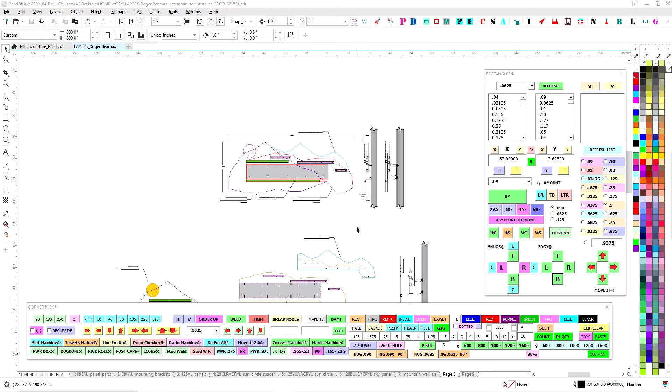All right, who wants to make some wall art? Let's go over how to put this thing together.

Let's go over how parts are laid out. 090 gauge is going to make some equilateral C channel. So look for those. We've got the backer for the panel and the backer for the wall.

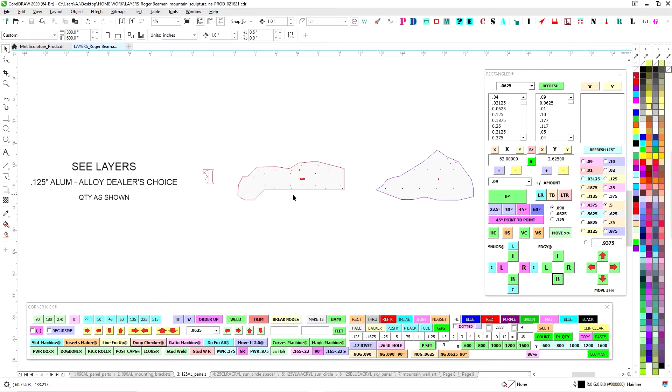That's how it's going to get mounted. The actual mounting panels are 1/8 inch. Alloy can be dealer's choice, whether it's 5052 or 6061.

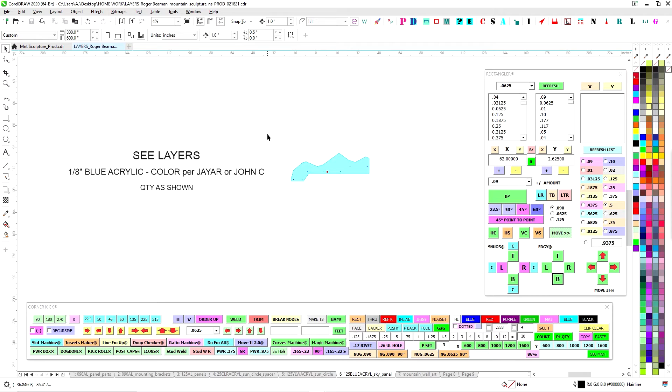We've got this little clear nugget that's a spacer for the sun. The sun is going to be a piece of acrylic, translucent yellow, but specs are per Jayar or John C. Same thing with this blue acrylic here, it's supposed to be the sky. It's translucent, but again, I don't know the color, so check with them.

We've got a pattern for install. Not a whole lot going on, just want to convey how it's all going together here.

So we kind of traded out the square tubing as it was originally designed for the C channel, so it's easier for us to make, and we can Cleco it and reference it and all that, so we don't have to do a whole bunch of nonsense there.

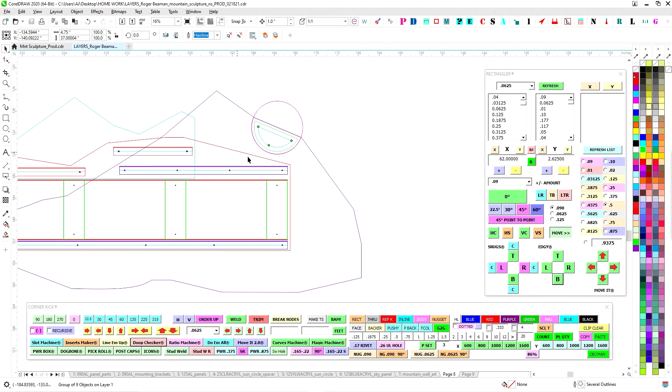But as you can see, you'll have the sun here, that's in magenta. That's going to be stud welded, so you'll have 3 stud welds on the one panel there, and then that's going to be sandwiched in between.

When you go to do final assembly, this guy has it here. I was thinking these are going to be 10-24 studs. We should have the acorn nuts left over, maybe we could put those on there and make it look clean.

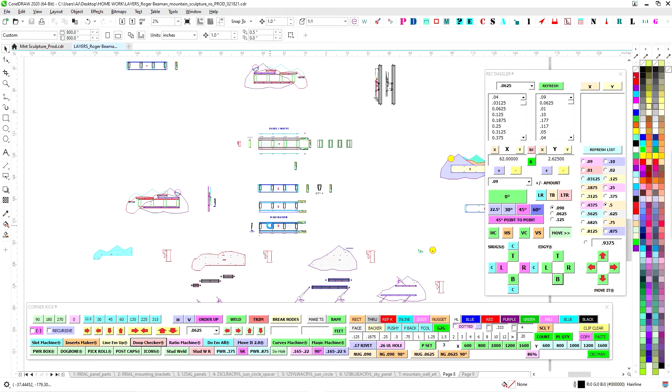The ones left over from the living desert, so look out for that when it comes to final assembly. But otherwise, it's all pretty straightforward.

What you're going to do is bend up your C channel first, and then you can choose whether to tack these little end caps in or do some masking tape and get them all set up, masking tape them all off and then just lords them in. That might be a little easier in the long run.

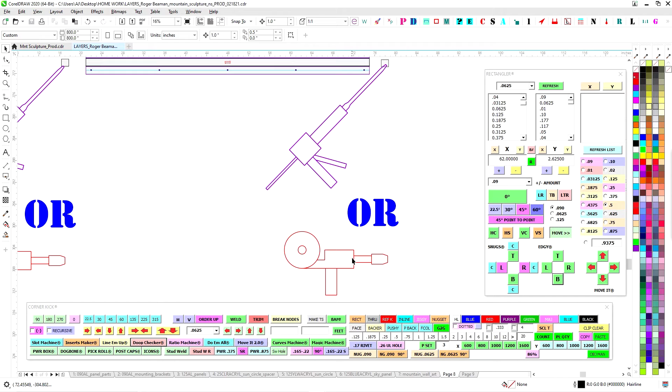We just don't want to do any burn through. We want to keep prep to a minimum here, so if you do tack them in, just be gentle and don't burn them. We're trying to keep labor to a minimum.

So get the channels all ready to go, and then you can go ahead and lords those to each panel corresponding. So I call this one panel 1 because it's the first panel out here in purple.

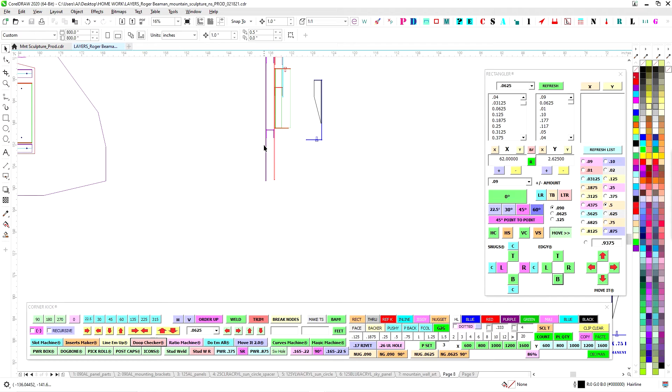So you'll take the 2 corresponding ones here. They are symmetrical, so it doesn't matter which way they go, just lords those on here. Make sure you lords them on well, because this is going to have to hold this on, and make sure that the channel faces down, so that way it kind of looks clean.

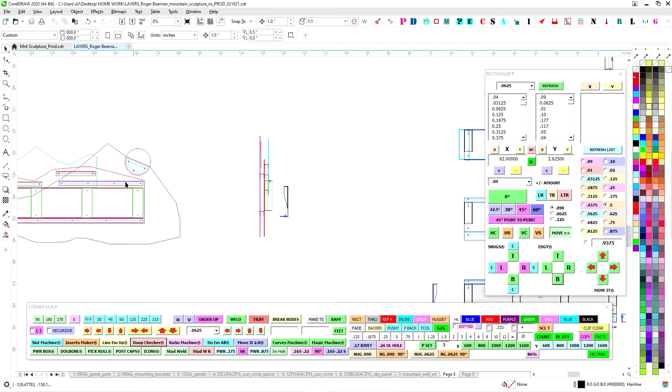So the ends will be capped, and if you're looking in from the ends here, it'll look all sealed up and everything. So on all the channels, make them face down, the opening. Then shoot the 3 studs here, and you're good to go.

That's panel 1 done. Same thing here. Once you get these all ready, go ahead and loarc them in the proper spots here, right there and right there. And then you'll also be getting the panels ready.

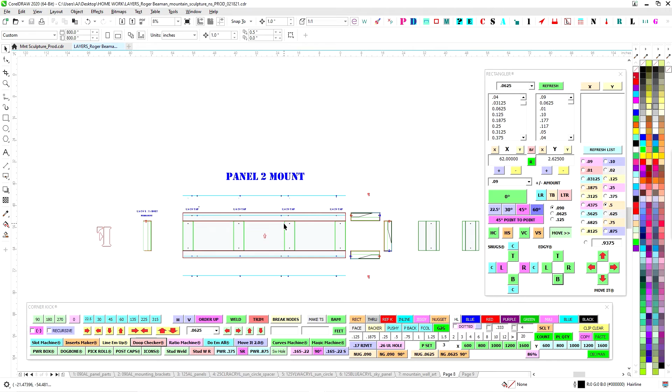So once you get that ready, then get these mounting panels ready. Kind of like what we do, you'll have for the one that gets attached to panel 2, you'll have the 2 asymmetrical ones. Those are the end pieces.

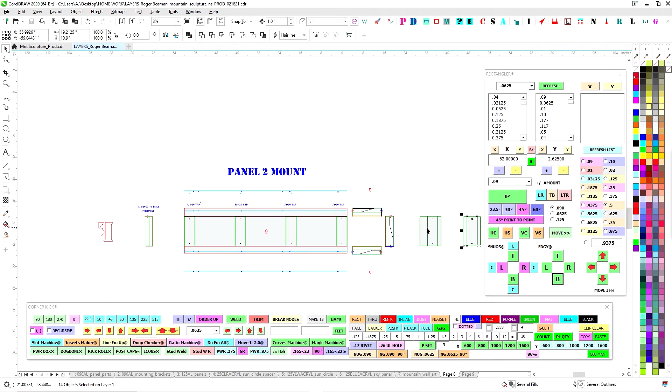They kind of close up the end, so you'll put those here, and then they seal up, so when you're looking at it from the side, it'll look all clean. The 2 middle ones are symmetrical, so you can put that either way, and these can go up or down no matter what, but make sure the long-eared ones go on the ends. You can loarc those in and then maybe tack on the inside just to keep everything sexy.

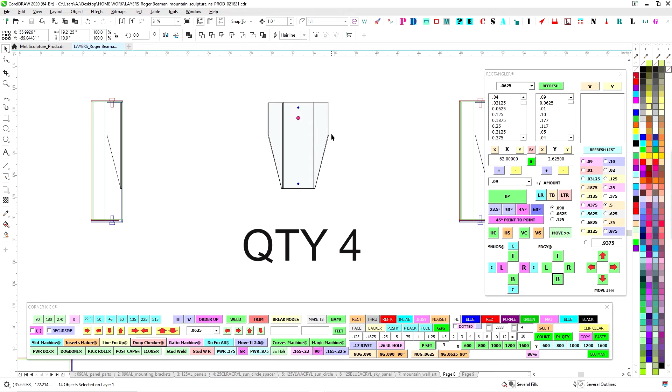Same thing with the bottom one here. You're going to have the bottom wall bracket here, you're just going to put these guys in. Now these guys here are clearanced, and they're only going to go partially here, so just loarc those in. Same thing, you can tack those if you want.

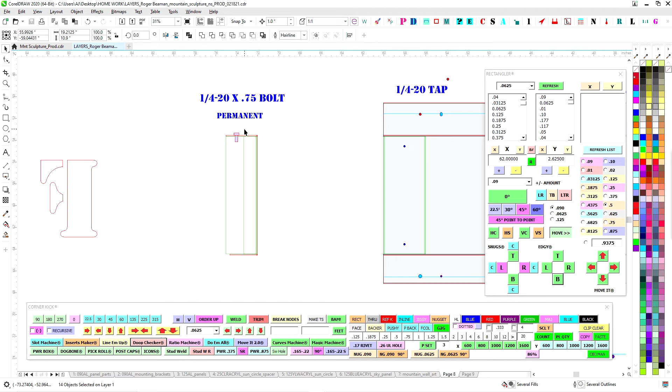And then both of these get a 1/4-20 tap. So you're going to 1/4-20 tap the bottom here, these 4 spots, and you're going to 1/4-20 tap the top of this one on these 4 spots. And then you're going to permanently mount a 1/4-20 by 3/4 bolt, so you're going to screw that in there and make sure that stays, and it acts like a stud.

Same thing here, so on the bottom you'll have that. What that's going to do is once this whole piece is assembled, the whole wall piece is ready to go, their panels are ready to go, this will be on the wall. Install comes in like this and comes straight down and clunk, there you go. So this will be permanently mounted to the top, and this one will be permanently mounted at the bottom, and it comes in like that, and that's kind of how it'll sit. So get those tapped up, get those put in, and they stay there.

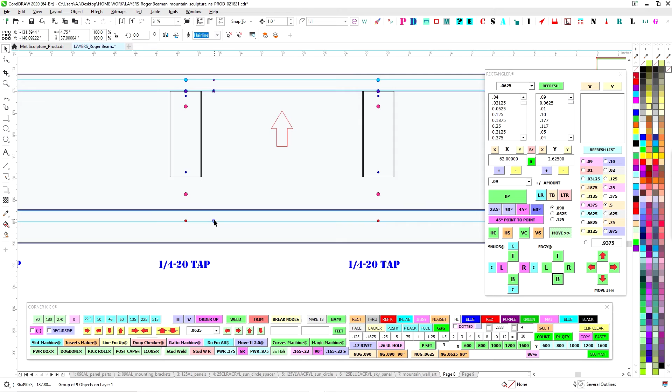I did provision some number 10 spots in 4 places that are sort of easy to get to. You can get to it here and here where the mountain and the sky is not as tall, and I put one right here where it's, you know, the shortest distance, and kind of here.

So once this thing's on the wall, install or whoever's doing this can maybe safety it off with a couple of screws to make sure that, if we ever have a 10.5 on the Richter scale, this thing doesn't come flying off. So anyway, that's how that'll work.

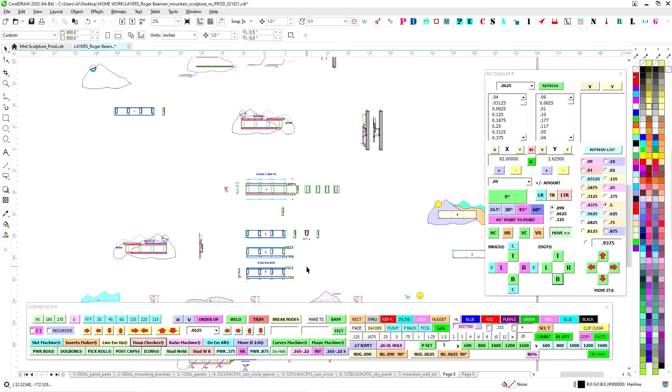Once you get this all built, then this whole assembly for the panel 2 mount gets loarced onto the back of panel 2. So you'll have your C channels and this whole panel, make sure it gets loarced on really well, and then possibly come through the face with some countersunk rivets for safety, just to make sure, because this will hold up all of this stuff here.

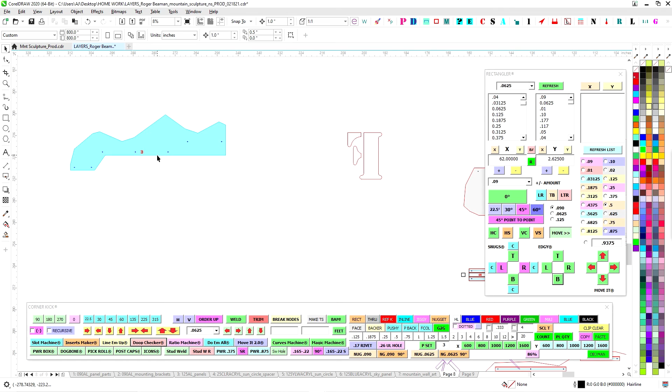But once you get that done, then it'll just be a matter of, after paint, the acrylic will then mount to these C channels here. So you can see when you go to assemble these bad boys, your acrylic will be here, and that will attach through to the C channel there.

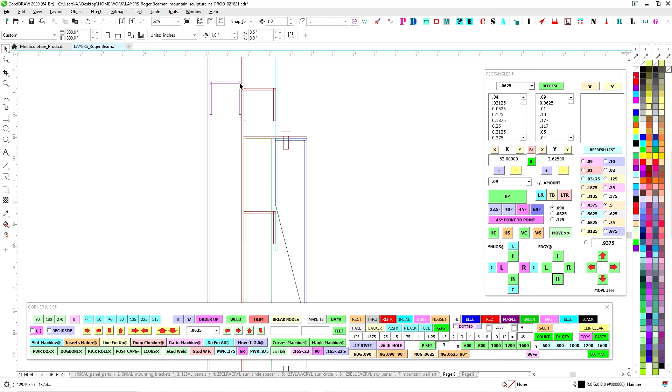Best Sign's doing it again.

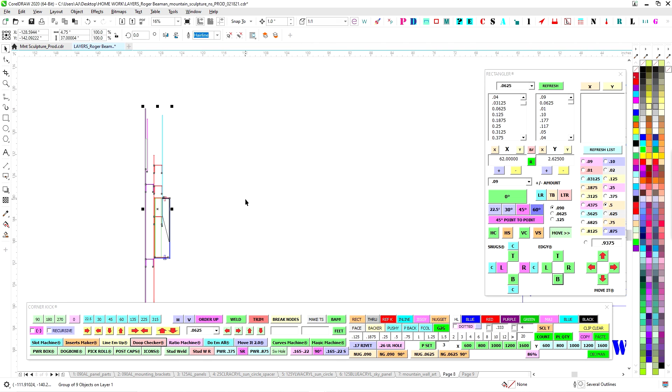So I think that's about it. Pretty straightforward. If you have any questions or anything, as usual, just give me a call, but I think that should handle it.